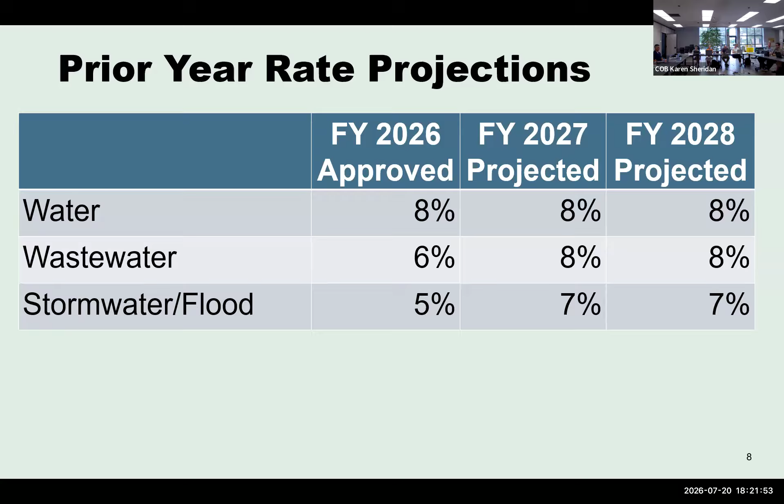While our rates do remain high relative to some of these other communities, we have seen in the last couple of years an uptick in rate increases across the board for these other communities.

I was talking to some of my peers this last week from around the area, and many of them are thinking about much higher rates than what we showed here. Some, like Broomfield, have double-digit increases. We did it a couple of years ago and they continue to increase rates. I was hearing last week some are contemplating double-digit increases, and if you think about some of the major water projects in the area and the cost and how those are going up, and the cities that are buying into some of those things, they're faced with a real dilemma. Because people are dropping out of this, the cost for the people who stay is going up, and they need the water.

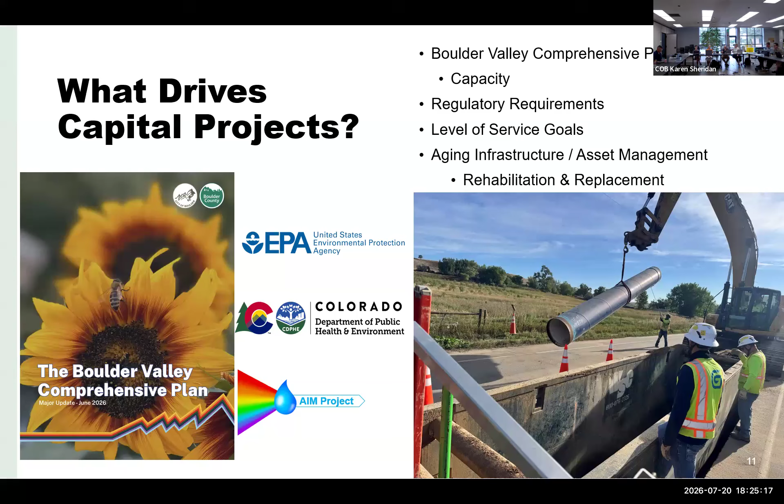There's a lot of influences on capital projects, as you can see on this slide here. Of note is the Boulder Valley Comprehensive Plan, which is in the final stages of the affordable housing approval process. It will be happening a little later this year. The biggest driver for utilities projects is the fourth bullet item related to rehabilitation and replacement of aging infrastructure using our asset management systems.

We prioritize projects based on likelihood of failure compared to the consequences of failure. You'll also see we use a utility condition index score, UCI. You'll see these UCI scores on some of the following slides. The UCI number represents a cost-weighted remaining useful life. This number is expressed as a percentage and indicates the remaining value of the system relative to its replacement cost. If the entire system were brand new, it'd have a UCI of 100. These numbers help us compare a wide range of different life cycle cost assets.

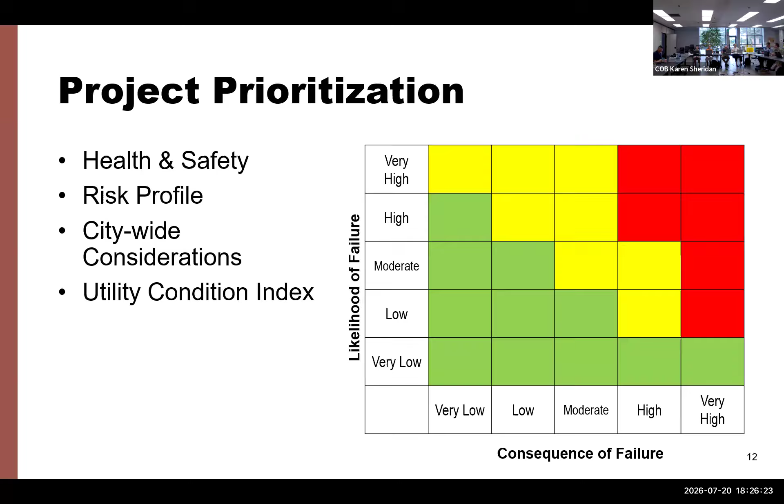Another way to think of how we look at our assets is what we call the traffic light concept. So in green, yellow, and red, where red is shown in this slide is that area where you have a project we want to address first because it has the highest risk or consequence if it were to fail.

In August, you'll see the 1-year capital improvement recommendation for 2027 in the context of the 6-year capital improvement program. So maybe now is an opportunity, before we talk about each of the utilities in more detail, for any questions on the big picture capital improvement process we're going through.

Can you show that prior slide again? Just walk us through. Absolutely.

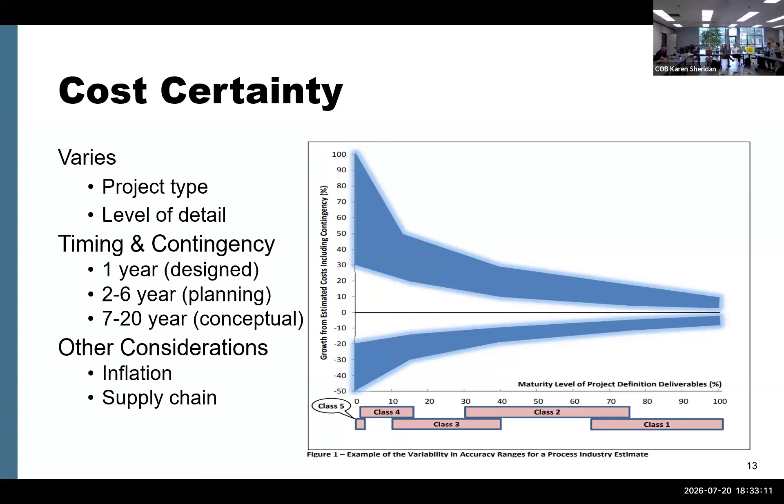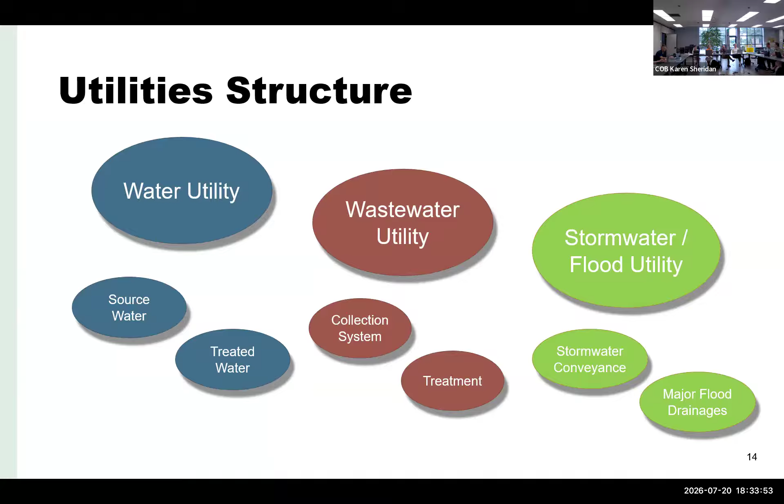So the next series of slides, we'll talk about each of the 3 utilities individually, and then I'll pause for questions as we go through each one. The water utility is made up of a source water system and a treated water system. We'll go through those individually in a little more detail, because they are pretty complex. In the wastewater system, we'll talk about the 2 components: collection and treatment. And in the storm and flood utility, we'll talk about stormwater conveyance, which is smaller annual rainstorms we get every year, versus the big, larger flood projects. We can go to the next slide.

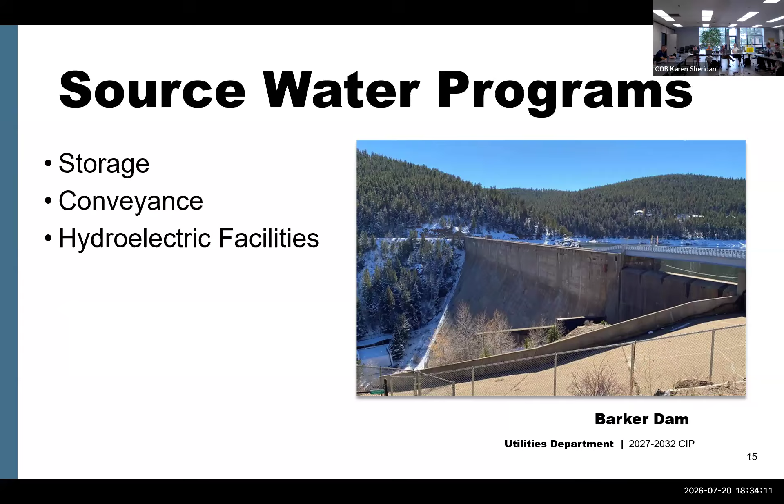This slide, we'll talk about the source water program. The source water program is made up of storage and conveyance—think pipelines—and some river flood and river conveyance and hydroelectric facilities. Let's go to the next slide.

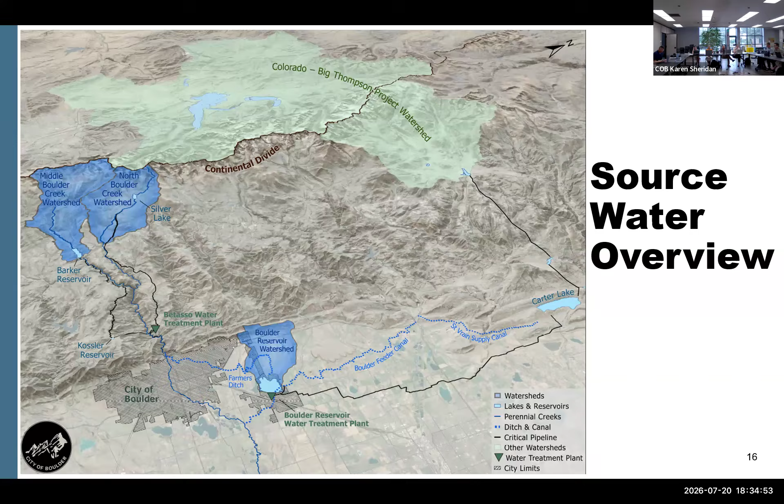Boulder water supply comes from 3 sources identified on this map. The sources are the Colorado Big Thompson project, identified in green, that conveys water to the Boulder Reservoir Water Treatment Plant. There's also the Middle Boulder Creek and North Boulder Creek basins, identified in blue on the left, which convey water to the Betasso Water Treatment Plant. The system consists of 15 dams owned and operated by the city, plus additional infrastructure owned and operated by the Colorado Big Thompson project. Approximately one-third of the city's water supply comes from each of our sources.

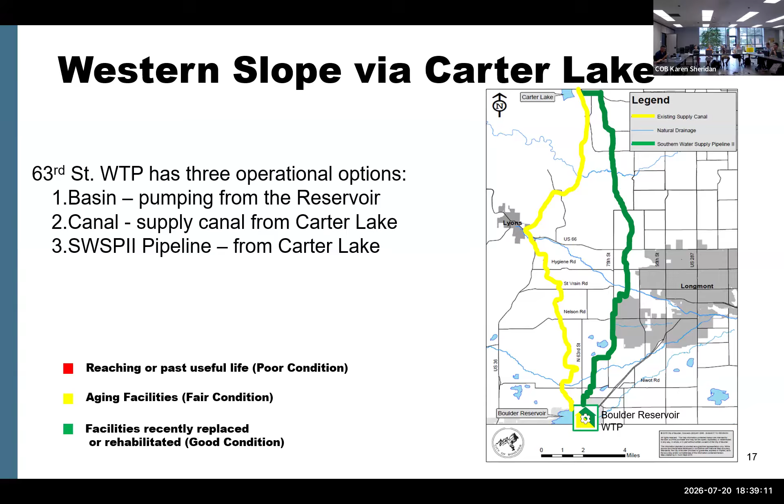I'd like to highlight a couple of projects, particularly around Silver Lake Dam, as there are components that are aging. We have some projects in the 6-year CIP where we're beginning to develop rehabilitation projects for Silver Lake Dam. I also wanted to highlight one CIP project currently under construction in 2026. Next slide.

Then go to the next slide. And is it green because you're assuming that the rehabilitation is done? Yes. If anything, this is green because, really, most of this project—the dam is functioning. It really needed some more stuff added to it, but it really is a facelift to get that dam to last another 100 years.

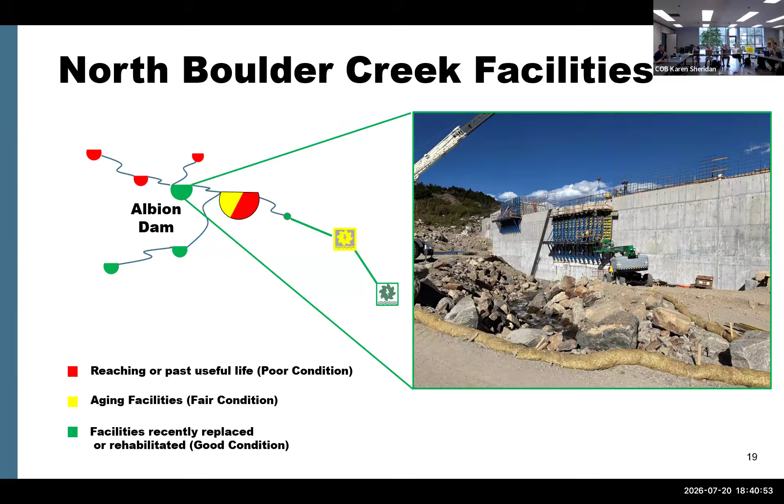Risk of what? Get rid of the big dams. Well, it is a big dam, and there have been over the years several major capital improvement projects. As we look at that dam, also in the context of regulations as we understand more, we're putting that in context, in particular around this concept of risk analysis: what is the biggest bang for our buck to minimize our risk, while still having a safe dam?

Is it a major multi-year, multi-million-dollar capital improvement project? Possible, but we need more data to understand that before we go into a major upgrade. This dam has not been characterized as a high hazard dam.

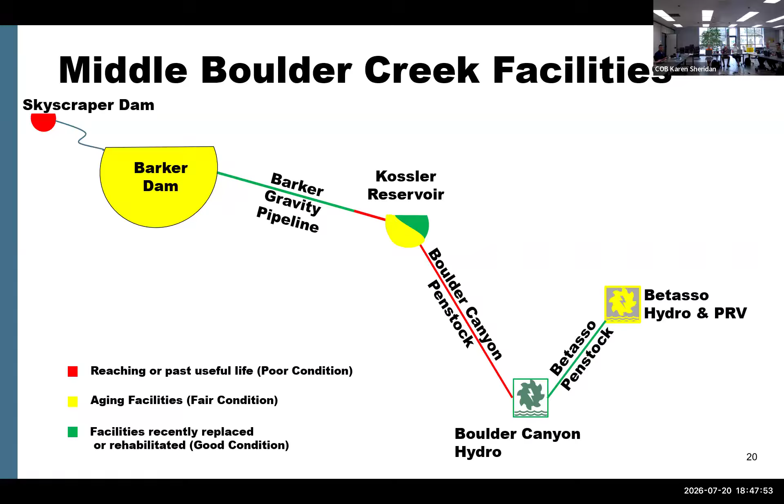Can you go back up? I just want to - I can't remember - go back two slides, or one slide. Yeah, this one. So with Green Lake Dam, similar thing with Skyscraper - what's going on there?

Similar concept - there's a smaller volume of water, not as much, so we can't prioritize it over Barker Dam and some of those structures that hold a much bigger percentage of the city's water supply. We'll fit those other dams in over time, opportunistically, once we get further down the road with some of the bigger ones - that's the story there.

Also that benefit - as you can see, all of those other dams filter down to Silver Lake, so we have that system to help as well.

How big is Silver Lake relative to Barker? It's about 4,000 acre feet compared to 12,000 in Barker - so a third. Albion is like 1,000, and some of the smaller dams are 300 or 400.

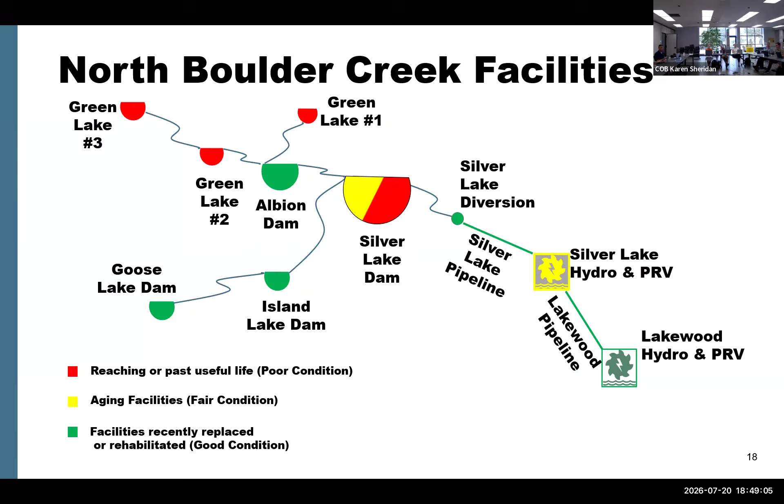Going from here, I wanted to point out one of the projects we're actively working on - the Barker Gravity Line. This picture shows contractors from the 2025-2026 winter construction season. We're replacing a siphon, which is a gravity line on that system - this should give you an indication of the type of terrain we're working with on this pipeline.

Before moving into the treated water system, are there any other questions about the source water system? I really appreciate these questions as we go along. It might be nice - I don't know if I could splice in a table with the size of the dams.

Go back to slide twenty - the gravity line. So the gravity line goes from Barker Reservoir to Kossler Reservoir, which is actually up on Flagstaff. And then there's the one that drops down to the hydro station right before the tunnel as you're driving up Boulder Canyon, and then goes back up to Betasso Water Treatment Plant.

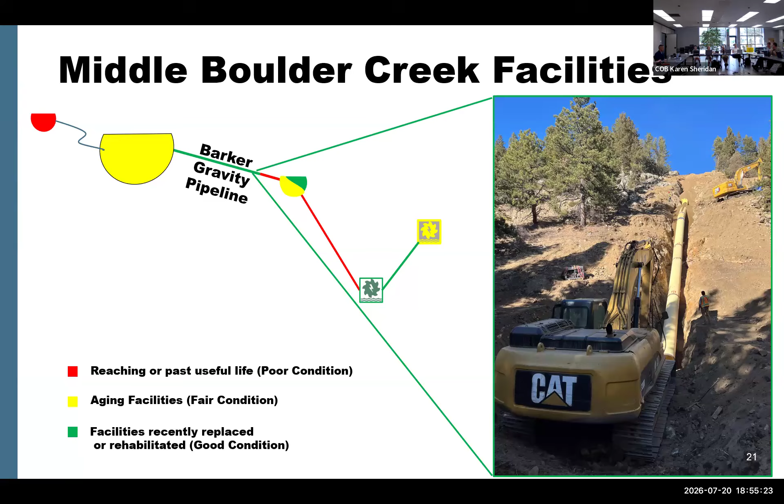The intent of tonight's meeting is to give us the framework. Next month we're going to get more into the specific project and more questions about what the plan is for 2027. This is just helping us get the pieces - and certainly in that aspect of things like the Barker Dam outlet works, talk a little bit more about what the plan around Barker is that you see in the CIP.

Let's not ask too many more questions, because - he likes questions, dude. Well, I think we have two items tonight, and I'm watching the clock, and I think we're doing okay. We can get done by 8, but we might want to pick up the pace a little bit. Chris has an encyclopedic knowledge of the system, and loves the opportunity to talk about it. Joanna's like, it's 4,000. Saying that, Amy.

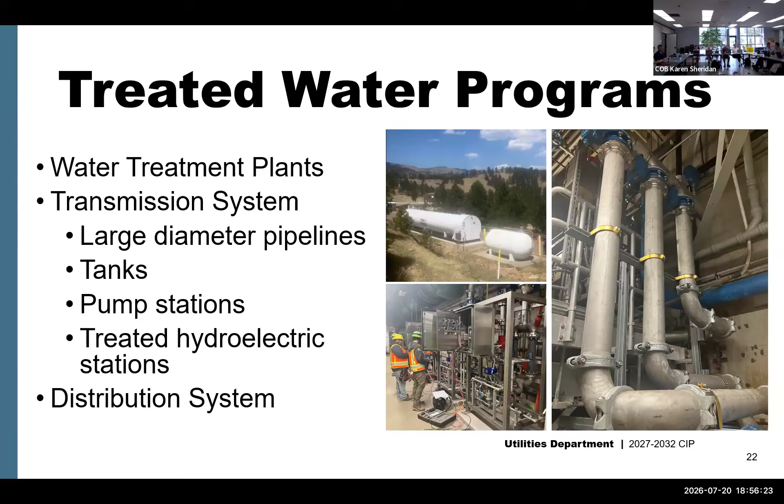Maybe I'll jump into the treated water system. Here we'll talk about the two treatment plants that we have and the transmission system—think the large pipes, anything 12-inch and larger, is the skeleton of the system to deliver water. Then the distribution system gets everything out to all the different small diameter pipes.

So the next slide gives you a spatial representation of the Boulder Reservoir treatment plant, out of Boulder Reservoir on the upper right-hand side, the star on the east side of the city, and then the Betasso water treatment plant on the western edge of the city, up off of Boulder Canyon. Now I'll do a couple of slides on each of the treatment plants.

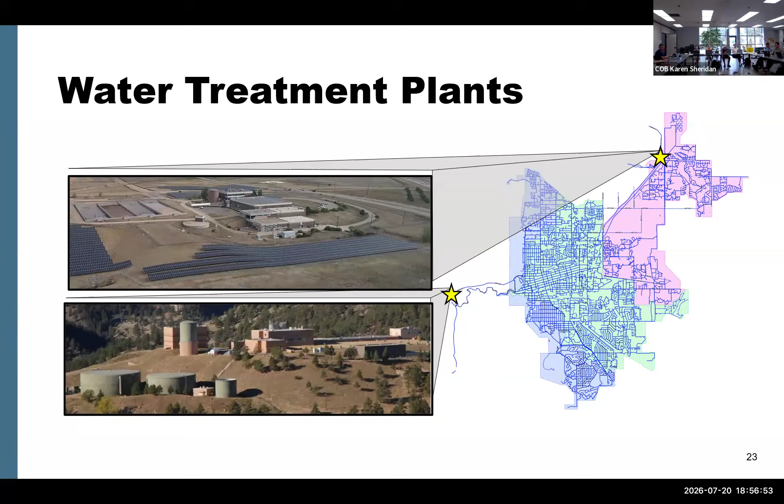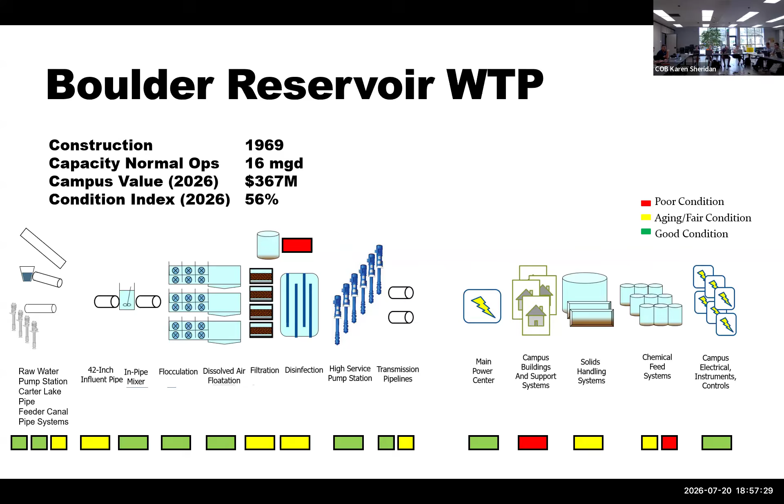We've done several projects in 2017 leading up to where the Boulder Reservoir treatment plant is today. Looking at the Betasso plant, it's in pretty good shape because we did a major capital improvement in 2017, and we're on the tail end of another major capital improvement finishing in 2026. But we still have to look at the backwash tank and the disinfection and chemical feed systems. At both Betasso and Boulder Reservoir, we're under contract with consultants to help address those chemical feed systems, so you'll actively see that in the CIP.

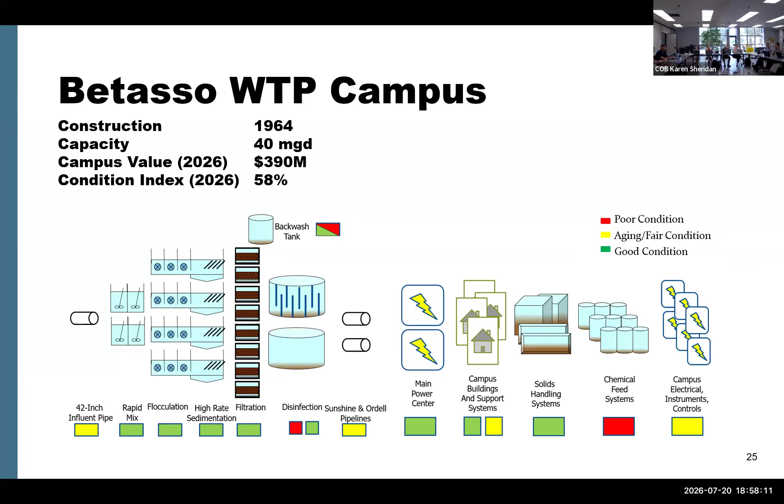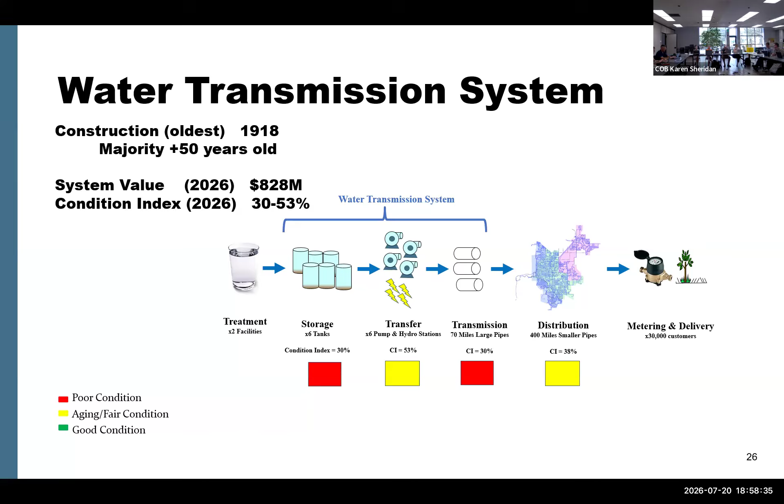Moving to the next slide on the transmission system—think the big pipes. This is similar to the 63rd water line project we saw on the site tour last year. That's on the transmission side of things, and storage tanks and transmission pipelines are areas we need to address in the CIP.

This next slide shows the layout of the system, and the big thing you can see is in the transmission, how we pump and convey water through the system. You'll see in green the 63rd water treatment plant pumping system and the 63rd pipeline. We have several large projects we need to actively move through the system. This is one of those areas where it takes a long time to move these projects, so we need to keep stepping through, and you'll see more transmission pipeline projects in the CIP next month—showing a lot of transmission line coordination.

How poor was the risk of failure? It's nearing the end, or at the end, of its useful life—you look at industry standard useful life versus its actual condition. On the 63rd pipeline, it was in pretty good condition when we pulled that pipe out, but it was near the end of its life on paper. We have 70 miles of that same generation of pipeline that we need to replace.

This isn't like taking a spoon and digging it into the pipe—it's not like that. The public might see it's marked red and think, 'oh my God, these things are about to fail.' That's not what this means. These are valid assessments being done; we're not trying to scare people. It all speaks to the dilemma we have: how do we keep rates manageable, but also keep our system reliable?

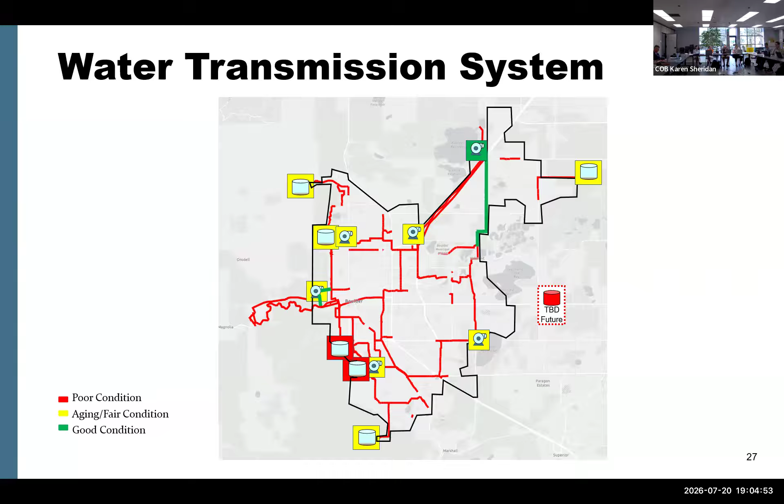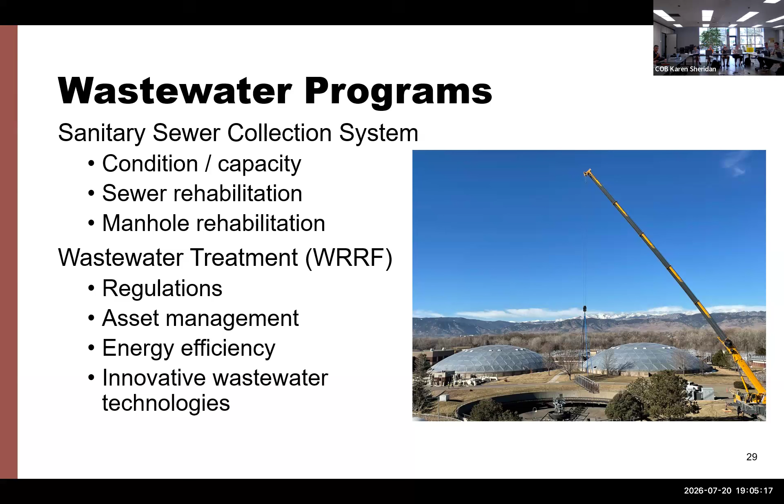Now moving into the wastewater program. It's made up of the collection system and the wastewater treatment at our Water Resources Recovery Facility, or WRRF—we'll interchange those terms. We have many projects in the wastewater program.

This was the sewer rehab and the storm and flood system. In 2014 or 2015, we brought a rate proposal forward, and Council said it's not aggressive enough and asked us to accelerate it. One of the utilities had a 75% rate increase—I believe it was the wastewater program—and that's what allowed us to aggressively go after this program, reducing the timeline from 100 years down to about 20.

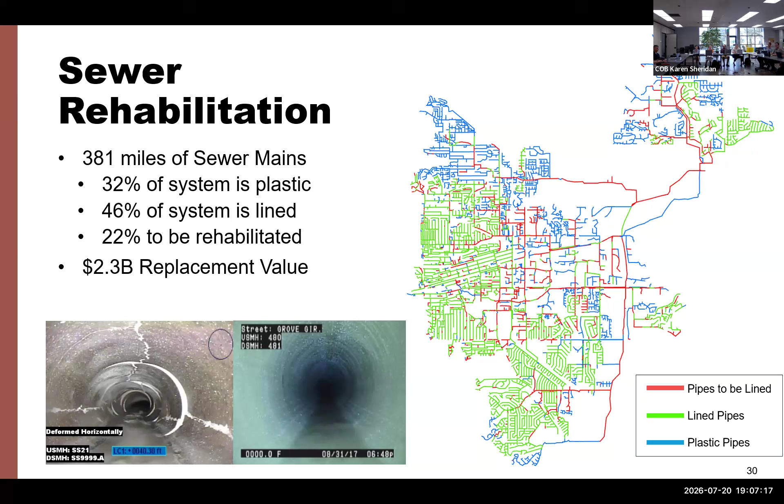And we've just recently completed the second of these major projects, what we call main sewer interceptor improvements, in 2025. So the increased wastewater pipeline capacity for these projects will improve wastewater flow from the majority of the city. We've got a plan to get through all of these major interceptor projects in the near future.

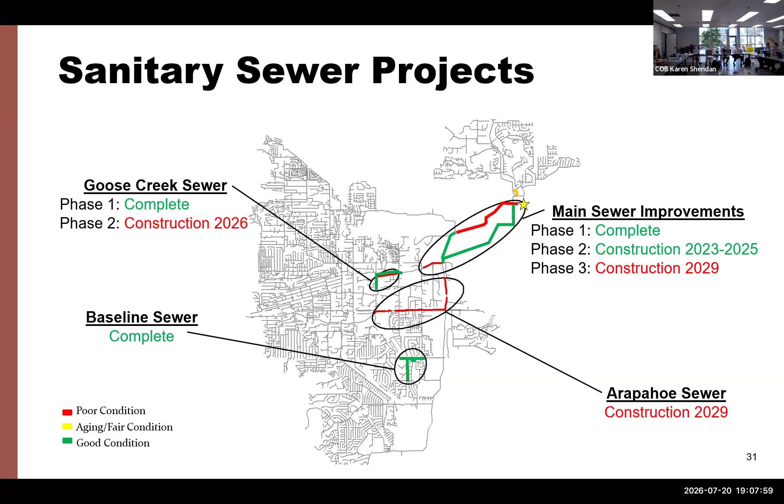Saw those last month. Yeah, and so Cole went into a lot more detail last month that I will not go into here.

That's the quick hit on the sanitary and the wastewater program. Unless there are other questions, we'll go into the storm and flood program.

I just don't want it, it's in '29, you've still got 17 million for temperature compliance, but Cole said maybe that's not, that might come out, is that? That is a possibility, but since we don't know when that permit is going to be released, we know we've got a big project. So when we go through the regulations, if it comes out, great, but until we know, we're planning. It's staying in there, keeping that project in.

'Cause it just dwarfs everything else. It does. And even here recently, I think when Cole talked about it, that's an area where it's still rapidly evolving right now from the regulated environment.

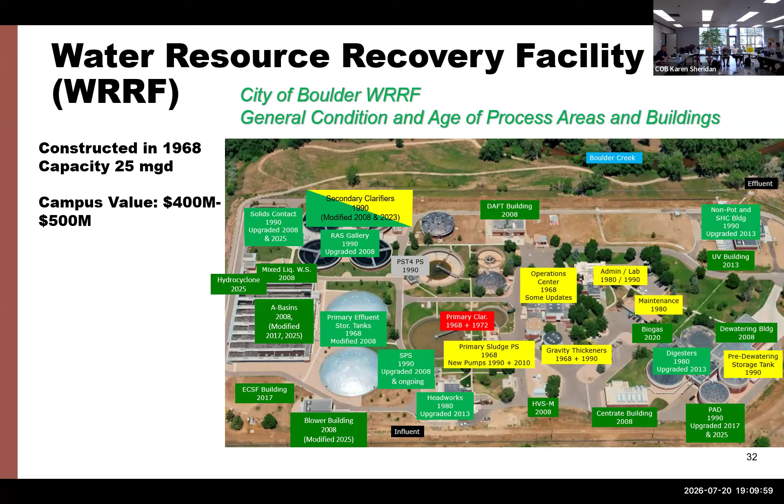So we're going to the storm and flood program, which is made up of stormwater conveyance, water quality, and the flood drainage ways.

We have projects on multiple aspects of this. For example, the picture shows a rehabilitation project that we did along Bear Canyon Creek over the last year, to address bank erosion on the side of the creek that was encroaching on the trail. This work helped protect the trail, improve the creek stability, and enhance safety for users. That's the top picture before and the bottom picture after.

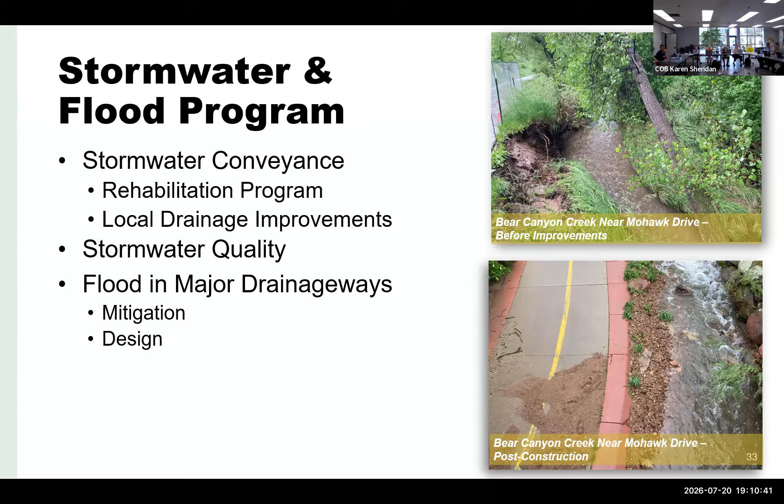These are all separate from... Yes, this is all separate, separate jurisdictions. This system collects the stormwater runoff from curb and gutter, collects it and sends it either to a drainage way or into a larger collection system. So it is specific to rain collection.

And during the 2013 flood, a lot of what happened was with the volume, a lot of these storm collection systems got clogged, which led to backups. So that's part of why we're doing this continuing assessment program. We do something similar in the wastewater program, where we take the entire system on an 8-year cycle, keep it clean, and check whether there are things we need to address.

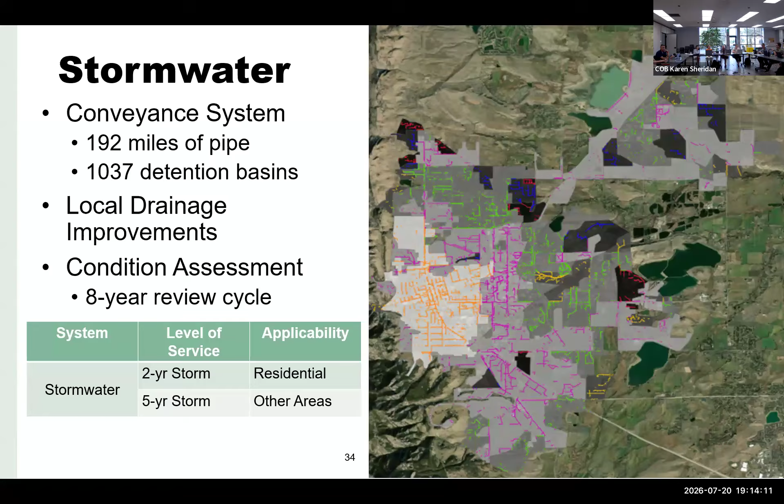And before we go into the flood system, I'm going to talk about water quality. Next slide.

So the water quality program not only seeks to comply with our state water quality regulations, but also to educate the public and improve water quality through better understanding of issues and enhanced stewardship. The city's water quality program conducts various water quality monitoring and special studies along the creeks, including implementing studies related to the E. coli total maximum daily load implementation.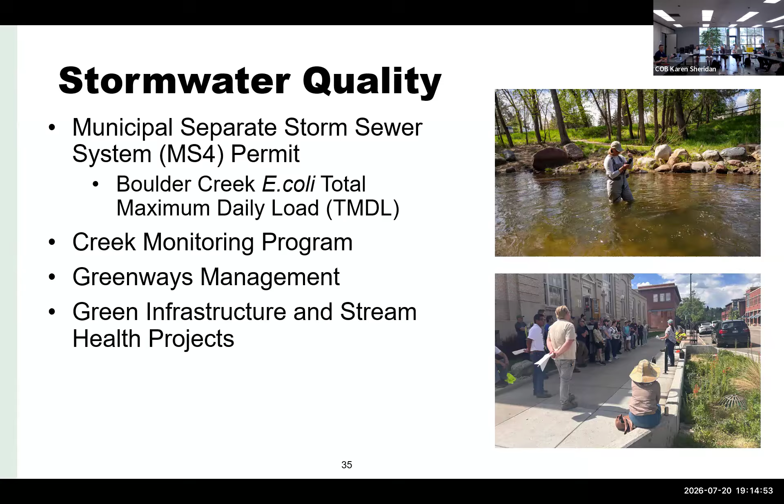So the comprehensive storm and flood master plan has taken those 16 major drainage ways, dividing them up into projects and trying to get to that 100-year conveyance level where practical. We look at where there may not be frankly enough space, given any particular construction, any particular reach, to put that conveyance. So let's get as much as we possibly can in that corridor.

Just a comment - if you really want to do this as a risk analysis, you want to know what's there that can be flooded, what's the value, and you could compare that to what level of protection you provide. That's part of the ranking that was included in the ranking analysis that I did with the comprehensive storm flood plan.

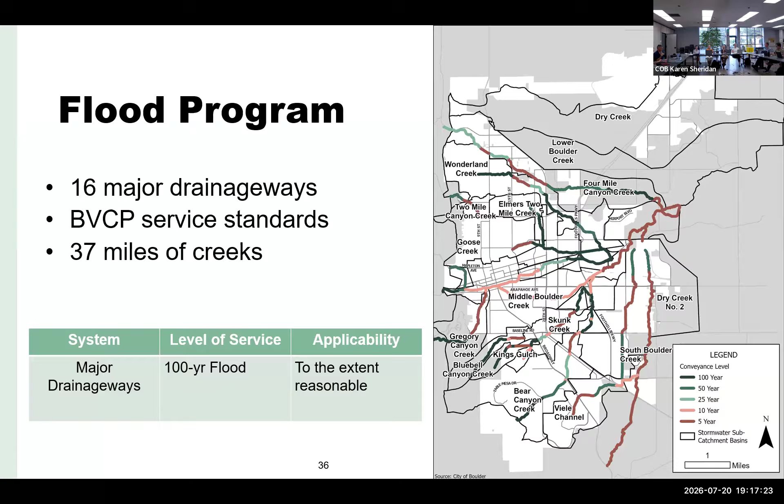And then finally, in summary, we're making significant progress on our priorities. We're going to have continued capital needs within all 3 utilities, but we manage projects for cost, and we're trying to manage and be aware of the continued increase in cost. We'll talk about schedule for the upcoming projects in more detail next month. Thank you for your time on this, and we'll get more into the 2027 to 2032 CIP program next month. So certainly open for any other questions you may have.

Question about how you're all thinking about the uncertainty regarding revenue related to drought restrictions, and how we're bringing in funding for these kinds of programs, and how that could potentially change as we ask folks to conserve water in the future. Could you elaborate a bit more?

So far, we're seeing water demand trend at about average, so we haven't seen a massive impact on water revenues this year. It's not to say we might not face revenue shortfalls in future years. We've seen revenue shortfalls happen in wetter years, but we do have a resiliency reserve set up right now, and it's about 10% of our rate revenues.

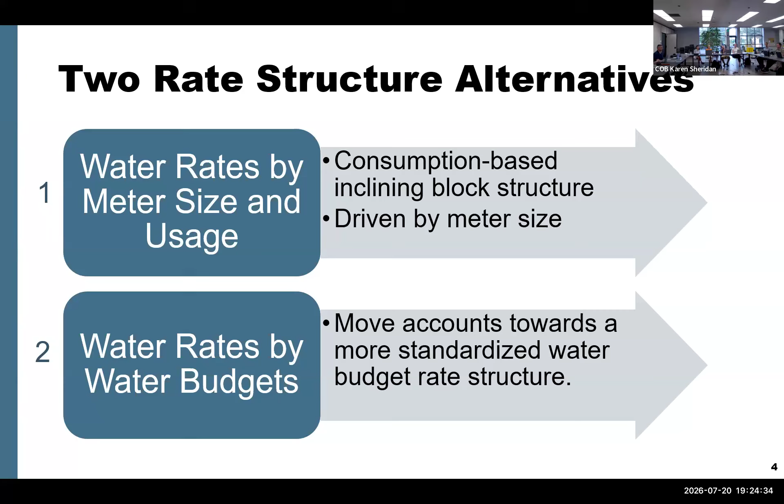So this first option we're discussing this evening is a block rate structure based on meter size. The basic premise here is that the more water you use, the more you pay per unit. These usage blocks are based on meter size, so larger meters have larger blocks compared to smaller meters, which would have smaller consumption blocks.

A nuance to this is that for our largest consumption accounts and our 6-inch meters, our largest customers, we would propose a flat revenue neutral rate under this scenario, just because there aren't enough of those accounts to build a reliable block structure around. So we separate the outliers and put them on a flat revenue neutral rate.

And again, that like CU would be a top. Yep, one of the top, correct. Are those outliers pretty consistent? Like, do those top five in terms of water usage stay the same? Yes, yeah, you know what they are. It's our industrial users, mostly, CU, NIST, Kindrel, Corden Pharmaceutical.

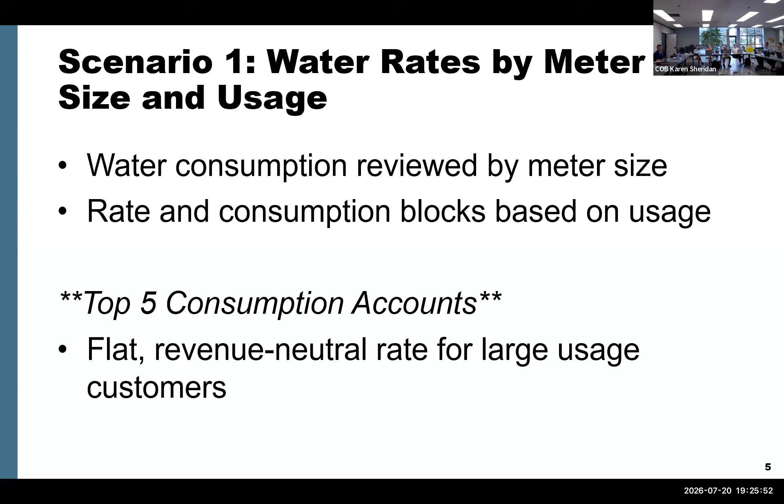So within this first scenario, the rate schedule is proposing 4 pricing blocks. At the lower block 1, it would be $6.73 per kgal, rising to $11.78 per kgal in block 4.

Something important to note here is that the rates are the same regardless of the meter size. What really changes by meter size is where each block starts and stops. I'll describe that more in the next slide.

We're continuing to evaluate these block rates. These initial price differentials are intentionally conservative to allow staff to observe customer response and assess performance under a potential new rate structure. So anytime you're changing up the rate structure, you really want to evaluate what customer behavior is like. This gradual progression is designed to support the transition while still reinforcing conservation signals. Right now, block 4 is about 75% higher than block 1, which is still a meaningful step up for high water users, but not an extreme one.

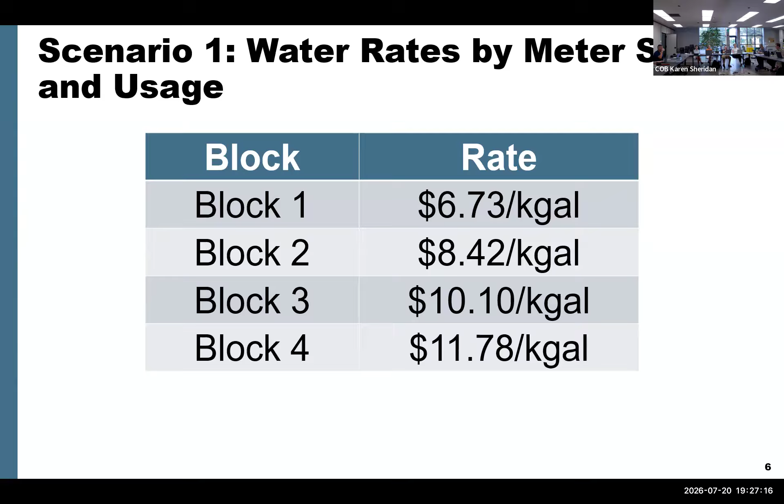So this is a busy slide with a lot of values, but it's really intended just to show where each of the consumption blocks start and stop, broken out by meter size. You'll notice these block thresholds vary pretty widely by meter size, but each represents the same thing: the point where usage shifts from typical to moderate to high for that meter size. For the majority of our customers, they would not see those block 4 rates.

A medium commercial customer would roughly be what meter size? Medium would be in that block 1. Okay, but I mean in terms of the meter size, the 3/4 and 2 inch? It's again pretty variable. We have a lot of customers within the 3/4 inch to 1 inch. As you get larger, you see fewer, very few customers. And that's really why for the 6-inch customers, we only have a handful who could build a reliable structure.

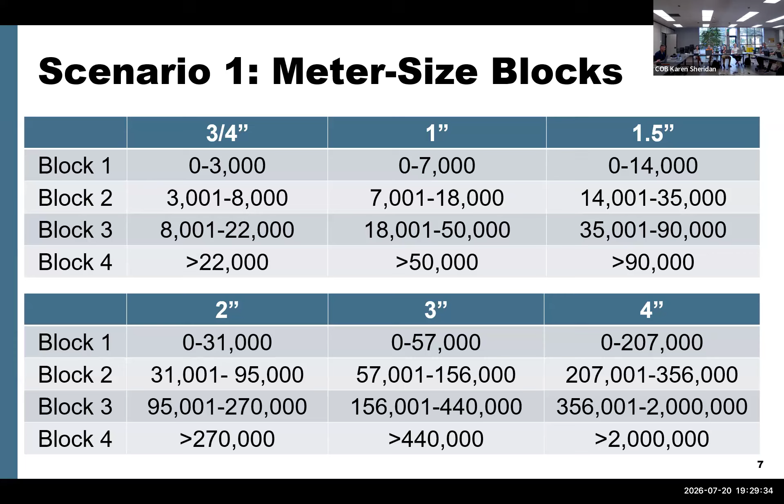I'll quickly get into scenario 2. This second option keeps our existing water budget rate structure, but standardizes how budgets are calculated across all commercial customers. Right now, budgets for most commercial customers are based on individual usage history, and that can swing significantly from one year to the next. You can have different types of customers move into the same space, and that might cause a swing in that water budget calculation.

One thing we've tried to highlight in this scenario is that there's a trade-off between predictability and customization. Even though customization might sound appealing, we found it really doesn't work well for every single one of our customers, and it remains a heavy administrative burden for staff. So we're looking at something more predictable and easier for staff to administer and communicate to customers.

Is there an issue of fairness in this too? It's more standard, it's just fair, everybody has simple rates, or is there potential for some to be treated better than others? I think it really depends, because there's such a high level of customization currently. In either of these scenarios, it's going to generate some customers who see cost savings and cause others to pay more. So it's hard to say if this checks that box across the board, but what we're going for is something transparent and easy for staff to administer while still being equitable.

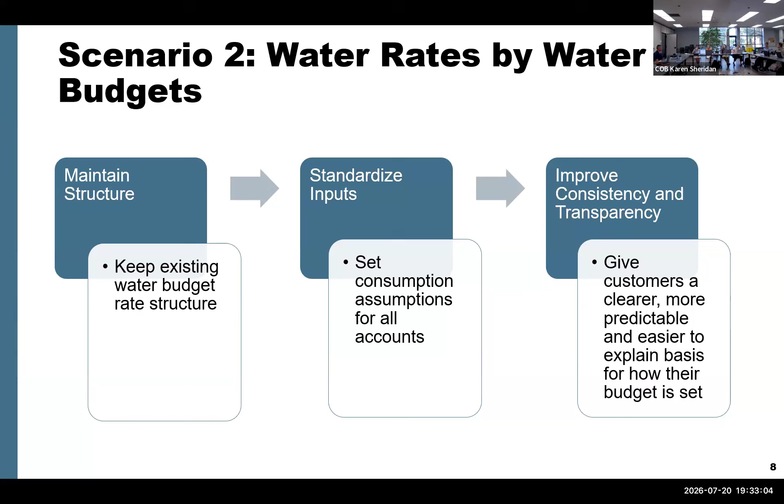So what we'd like to do is move everyone from the ES account—the efficiency standard—and the PIF account, the plant investment fee account we currently have, an average winter assumption account, and we also have a historical monthly usage account.

To break it down more, the water budgets for our AWC and HMU accounts are based on those individualized history-based budgets, where AWC is based on average winter consumption, and historical monthly usage is based on a year average. So even there we've got 2 different calculations for these budgets. The AWC gets updated every April 1st, and the HMUs get updated every January 1st, so they're not even on the same timeline.

So what we'd like to do in scenario 2 is move those AWC and HMU accounts to the plant investment fee, or PIF, account type. PIF account types are really the standard account type now for new customers. So whenever there's a new business or developer that wants to connect to the water system, they're assigned a PIF account, and the water budget for that account is established based on the amount of PIF capacity they purchase. So what we'd like to do is move these legacy accounts over to a PIF account.

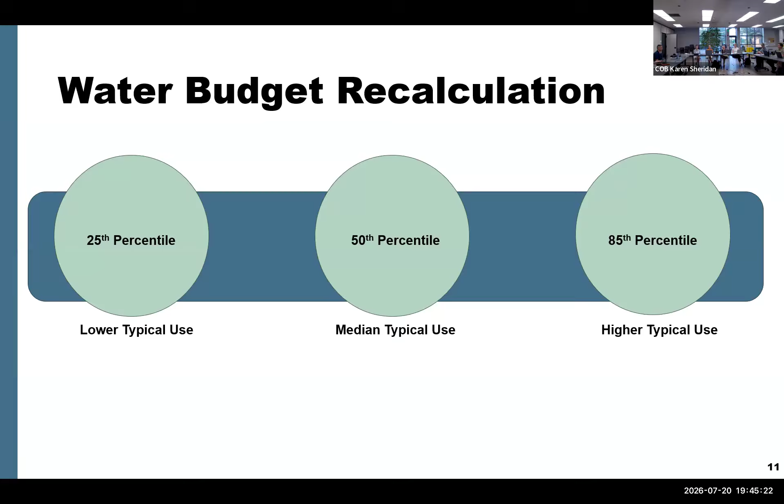I'll just ask a question, we don't have data centers in Boulder that blow us out of the water, so to speak. We have one. Yeah, the IBM facility has always been a data center, actually. Oh yeah, that's a good point. There's a couple much smaller ones. And they have their own water. I think in real time they're refining their water use, so it's less impactful. Energy still remains a bit of an issue.

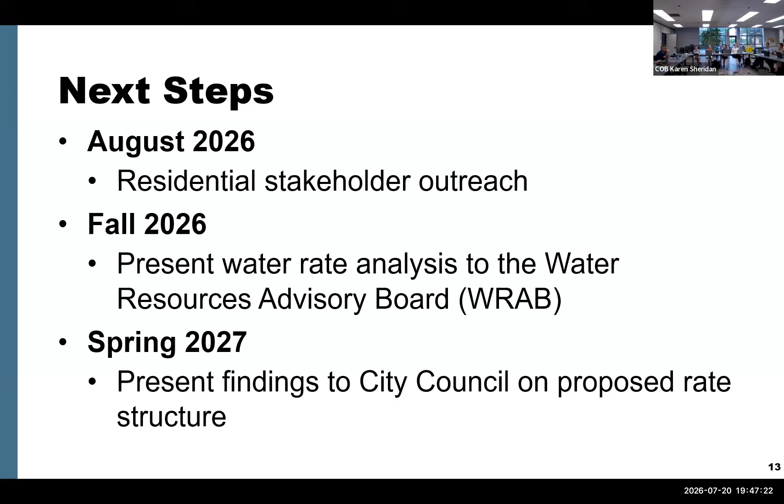Thank you, Stephanie. So the next item on the agenda is matters from the board. Does anyone have any matters from the board? Just an update on the drought situation, water supply. I was going to get that under matters from staff. All right, very good, so if you'd like. Yeah, please. Okay, I'll start with that one.

For the water supply update, our situation is pretty stable, all things considered. We didn't quite fill Barker, but we almost filled all of our reservoirs, so feeling good about that. I've been paying close attention to our usage, and there's no way to prove it, but I think our messaging has been effective because usage trends have been at about average and even less. People are responding to the rain events, turning off their sprinklers and turning them back on when it warms up again. With the type of year we're having, without the messaging and without any action, I believe we'd be way over typical use. So I think the good news is our situation is stable. I talked to the neighboring municipalities last week, similar story there, varies a little bit, but we're staying in touch. So big picture, that's what I have on that one.